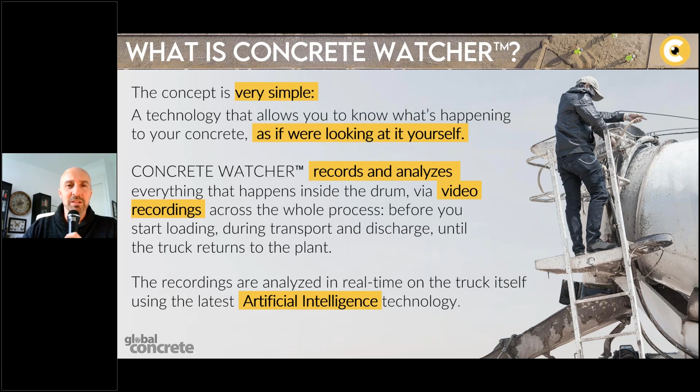So with these recordings, it's kind of like a security camera, but you don't need to look at it, like in the movies where the security guard is looking some other way and so the robbers go in. It's analyzed with artificial intelligence, so it's looking at it all the time, and it's checking all the time what's going on.

So this is a real and worldwide need, and here I put an example of a client of mine. They text a lot every day in a WhatsApp chat, checking what's going on site. So the boss is telling one of the lab technicians, please arrange a technician to check the slump for all trucks here, they mean at the plant, and then follow the truck on site to ensure no water is being added. So this happens everywhere, and this has been happening all along.

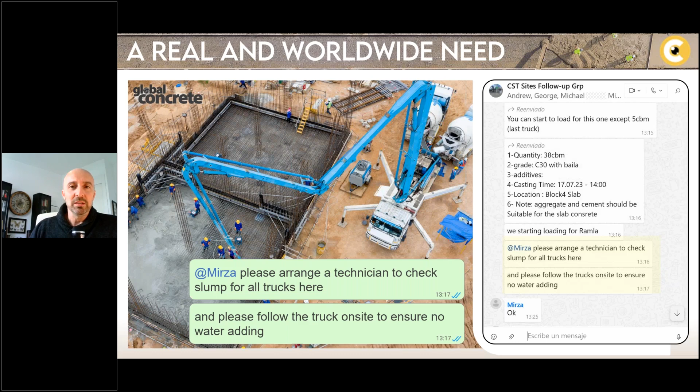People need to police the drivers in a way, or to guard the concrete to see that nobody is tampering with it. So this technology solves this need. So the system is installed on the truck. It's basically a small box that you put down here, number one. It has a camera that goes up there by the loading chute. And this box produces a Wi-Fi signal and connects to the internet, so you can see what's going on in the cabin, and you can see what's going on online from the plant or from a mobile device.

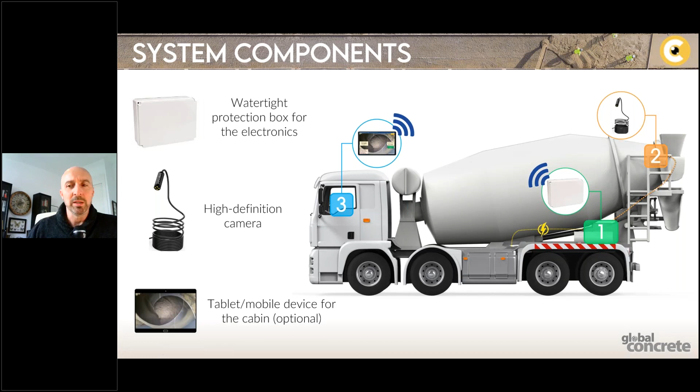So what does it do and how does it do it? It has this camera and it does a continuous recording of what's going on. So you have guaranteed traceability. It records very short videos, like 30 seconds, continuously, and they are associated to the truck and to the exact date and time. So you have the whole history of what's going on with that truck.

Then the AI analysis, artificial intelligence analysis, happens on the truck, so it doesn't need a network connection. And it happens in real time. And it can give alerts. For instance, the most basic alert is that the camera is covered, so the driver needs to go clean it.

And also, the driver can operate the system. It can run automatically, or it can have an interface with a tablet or a mobile phone to say, okay, I'm doing this, I'm doing that, start recording, stop, etc.

The data transmission is automatic. So it has a SIM card like your phone, and it uploads that analysis and it uploads the videos, so you can watch and you can see and you can get all these alerts from the plant or from wherever you are in your phone. It gives you this online access in real time to all what's going on, and you have a full-fledged management application where you can see what's going on with each truck, with the fleet, etc.

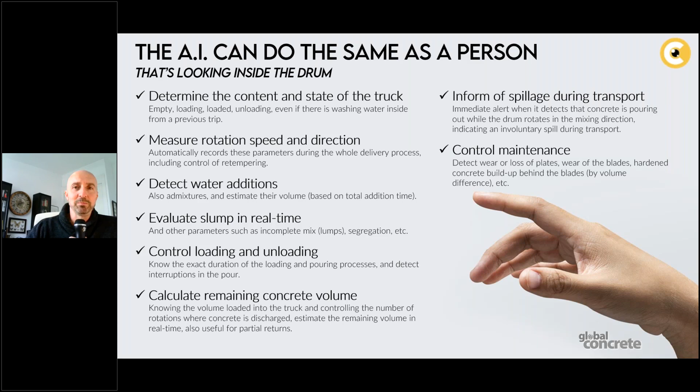But being an artificial intelligence, like a robot, it's better than any human because it's always alert. It doesn't sleep, it doesn't get tired, it doesn't get distracted. So it's doing its job all the time, 24/7. It learns continuously, because it's like one central brain looking at all the concretes all around, with many eyes. Each camera we have is one eye. It's like having hours or years of experience put into one person, in one brain.

It makes objective evaluations. It doesn't cheat. It doesn't tip the scales to get the result that is convenient or that it likes, to cover for someone or something like that. It records everything. It doesn't forget anything because everything is recorded, and it's hard proof, hard evidence of what's going on, because it's a video recording.

And it gives you immediate alerts. It's like it doesn't forgive you. Whenever something is wrong, it will tell you, and if the driver is not cleaning the camera, for instance, it will tell the boss immediately. So there's no escape from it.

So it's a patented technology. We filed the patents in Europe and USA for this. And these are some examples of installation. These are some of the first prototype units. This one is in Belgium. You see where the box is attached. It's a very small box, easy to attach.

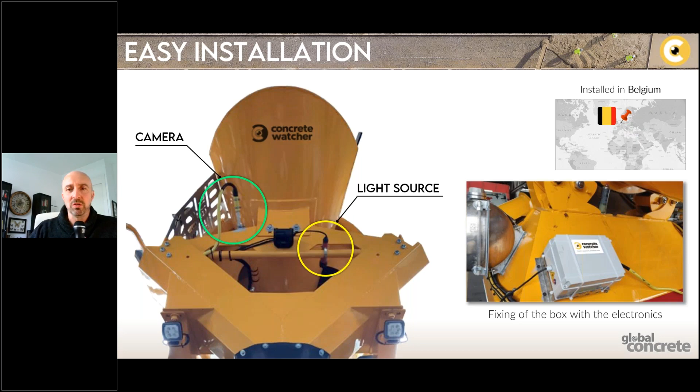It just needs the power from the battery pack. So no connection to the central computer of the truck, to any of the truck systems like oil pressure or air pressure or whatever. Okay, and then the camera and the light source, it's very easy to install. Actually, in this case, we had this pipe here in this truck. Every truck is a little bit different, but we put this light with just the metal bracers.

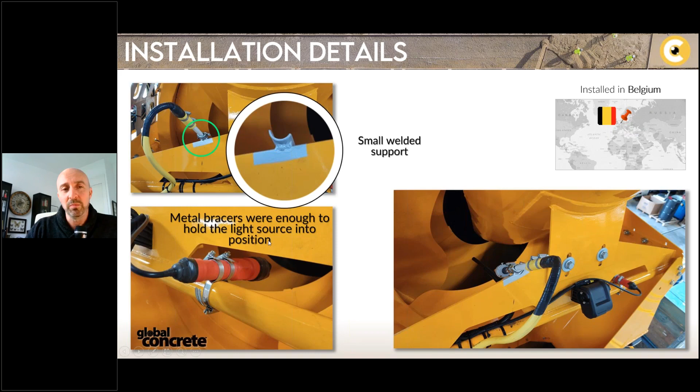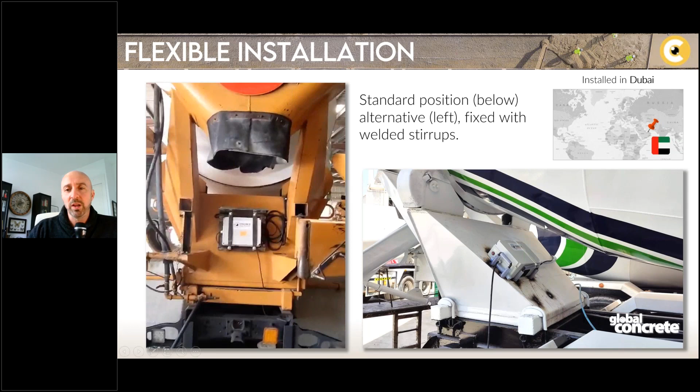This is a very powerful flashlight to see the end of the drum. You'll see in a bit. Okay. So there are many alternative positions for this. Usually this goes in the back of the truck for the length of the cable of the camera, just that.

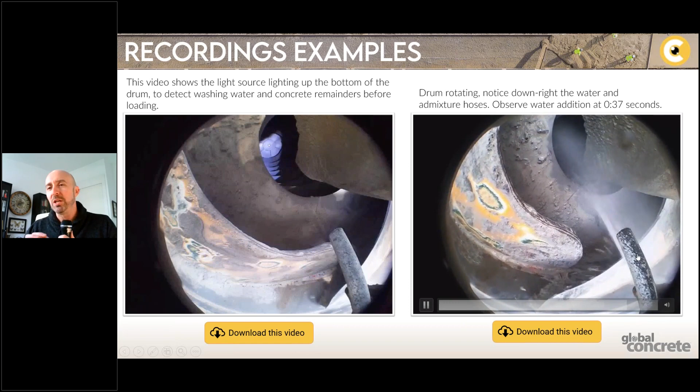Okay, it cannot actually measure how much water because it's not a flow meter, but we can calibrate for the pipe and see how many liters go per second, and then we can check how many seconds water has been added. So it's a very good assessment of how much water has been added to the truck.

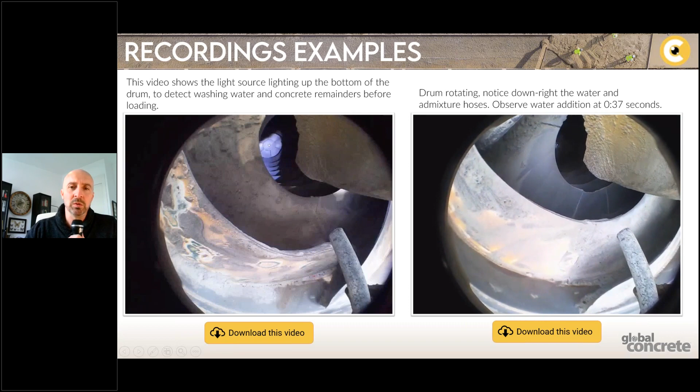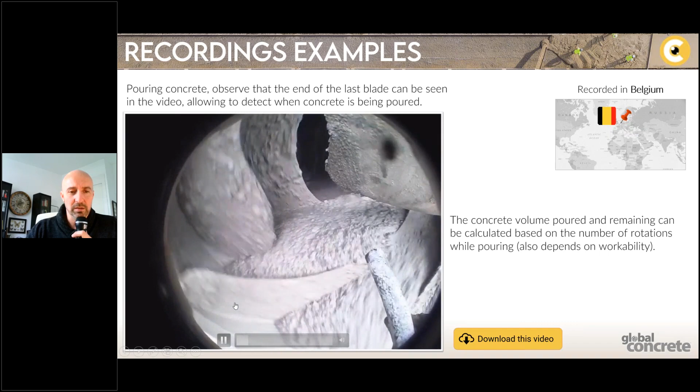In this one, we see the concrete unloading. You can see here, and here's the very end of the last blade, so you can see the concrete actually pouring out. Okay, there is a small stain here. This is not relevant for a cleanup or clean me alert.

And here we can see the rotation speed. We can see the slump of the concrete. We can evaluate the slump of the concrete on how it flows, how it goes on top of the blade, etc. And counting the speed and counting the rotations, we can calculate how much concrete has been poured out.

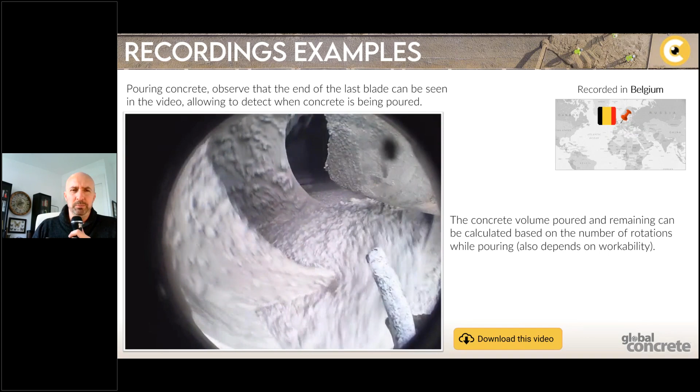So in this particular case, it's a very large truck, like a 12 or 14 cubic meters. They can do that in Belgium. So it takes a long time to unload the truck. And this is a very valuable information for the logistics.

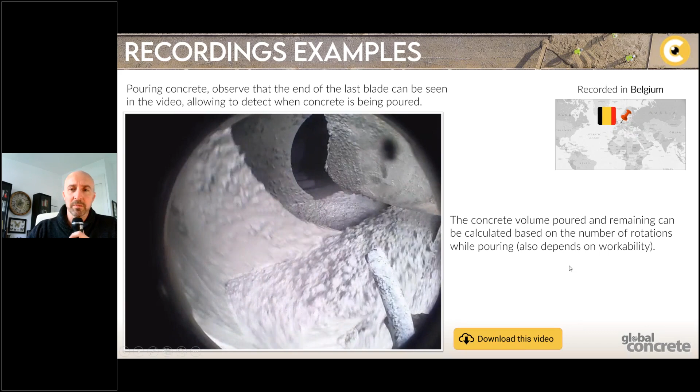And this is another example in the UK. This truck is turning the other way. It's built differently. So this direction is loading direction. And this was in transit. So you can see now, and you'll be able to see in a second, that the concrete is going out. So what is going on here? The truck is turning in the loading direction, but the concrete is coming out anyway. So that is a spillage during transport.

Okay, I was actually in the car behind the truck, and if you can cross-reference that with the GPS, and we can do that, we can connect to a GPS system, we can pinpoint where the spill happened. Okay, exactly which corner, which street this happened.

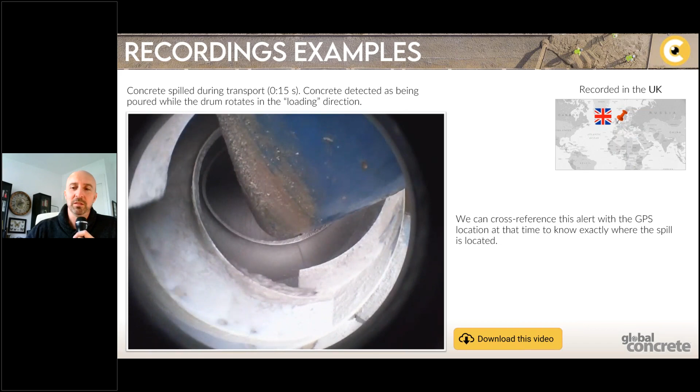Okay, and these are the analysis and the alerts we can produce. Okay, so it has a full-fledged management tool. These are some screenshots of the software, this management app that I mentioned.

Okay, so you have a fleet status in real time. You have a list of alerts for every truck. You can get a detailed activity log for each truck, statistics. You can check the history of the alerts and of the videos, etc., and you can receive these alerts by email or WhatsApp or Telegram. Okay.

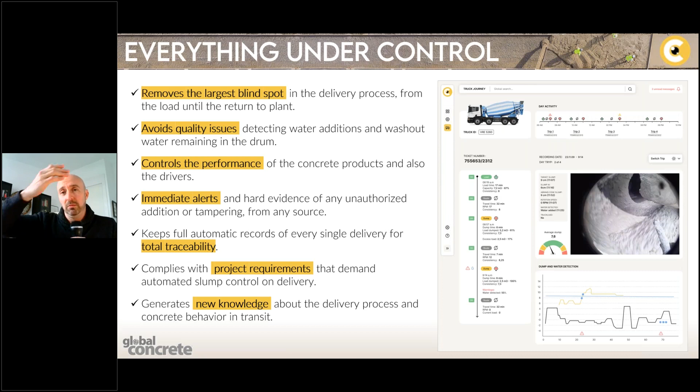So this system with this app, and this is also a screenshot, removes the largest blind spot in the process, because we know what we do at the plant. Then it's like this: we close our eyes and we don't know exactly what's going on. We need to trust people to write things down on paper, and then we kind of know what they do on site, because they do the slump check, air check, density, and then they test specimens for strength and durability. So having this system avoids a lot of quality issues.

Okay, you can detect the water additions, you can detect the washout water from the previous trip that's in there before loading, which is a typical trick that the drivers do. It controls the performance of the concrete and also the drivers. You get these alerts, you have traceability, and it complies with project requirements that demand an automated slump control on delivery. There haven't been many, but they are growing.

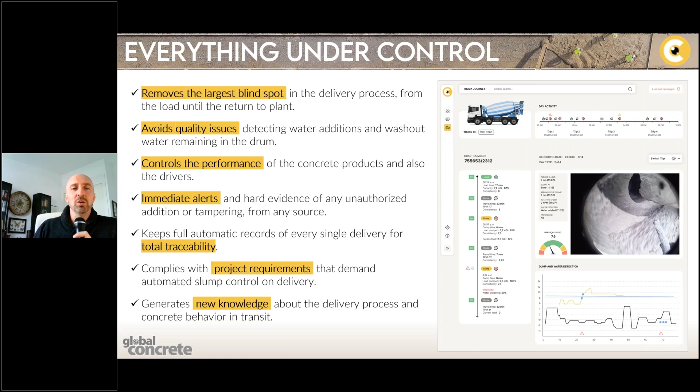Okay, the one big example in Europe, where most people are from, is the HS2, the high-speed railway in the UK, going from London up north. They require these type of systems in the trucks to be allowed to deliver concrete. Okay, and this also creates new knowledge about the delivery process, because you get a lot of information that you never had before on how the concrete behaves, on how the people behave, on what's going on.

Okay, and we can combine that with our other system, which is my original system, which is a full-fledged quality control, quality assurance system called Concrete Quality. Okay, where you get all the materials information, all the mix designs, management, and optimization. This system connects to the batching system to get all the batch records and analyze the actual weights. We get automatic weather information.

We get all the testing that's on site for fresh concrete with slump and air, etc. All the test specimens for compressive, flexural, shrinkage, whatever. Okay, and any other monitoring devices like maturity or durability sensors. And also we get statistics and reports and testing plans, etc.

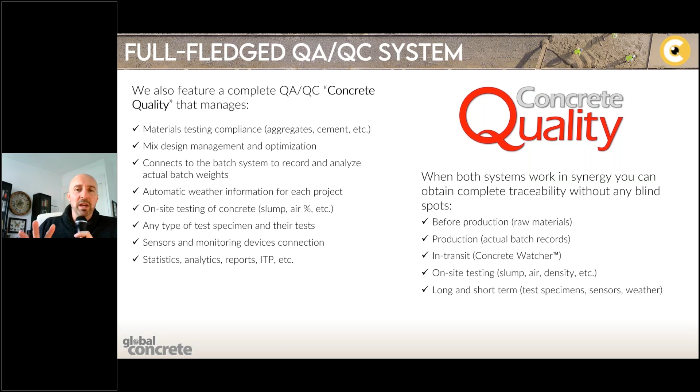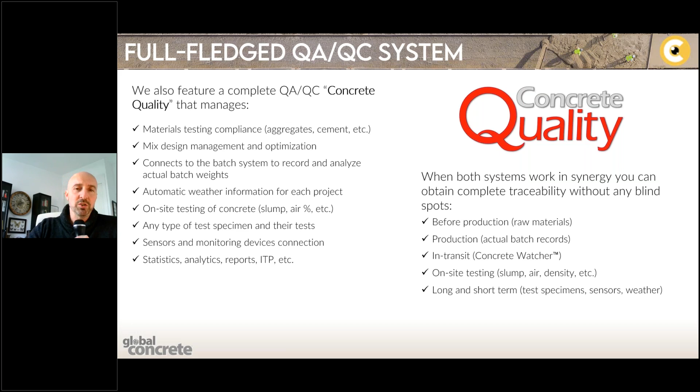So when we combine these systems, we have a synergy, because we have complete traceability without any blind spots. So we know what's happening before production with the raw materials. We know what's happening during production with the actual batch records. We know what's happening with the concrete during transport. We know what's happening on site, because we get that information into the quality system, for the fresh concrete and for the hardened concrete.

Okay. So when we combine these systems, this combination will allow us to do things like predicting the strength or the durability just before you pour the concrete. Okay, so this can actually avoid a pour where you will get a low strength, because you have everything under control.

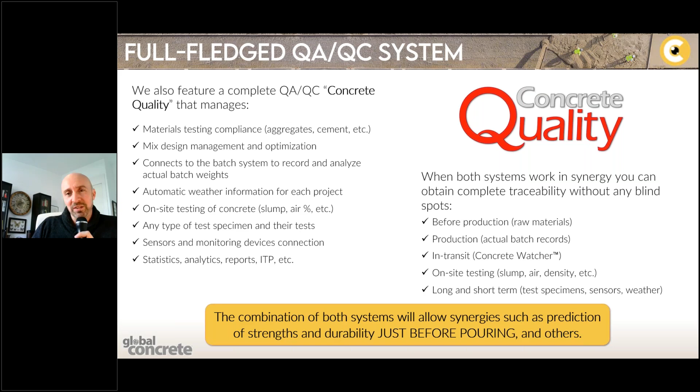This can also be turned the other way around to say, okay, you can add water up to this point and don't add more because you will get a fail, or the truck has been waiting too much time, the concrete is getting hard, so you pour it now or you take it back before you have bad concrete on site. Because that is very, very expensive. It's around 25 times the sale price of the cubic meter to remove one that failed.

So in the end, we have this complete system, which is like a self-driving system. All of these things happen automatically, because we can get the information from the plant automatically. We can read PDF reports from the aggregate testing or the cement testing automatically. Then we have this central key new thing, where the AI is giving us the analysis of what's happening in transit. And then we have everything that happens on site.

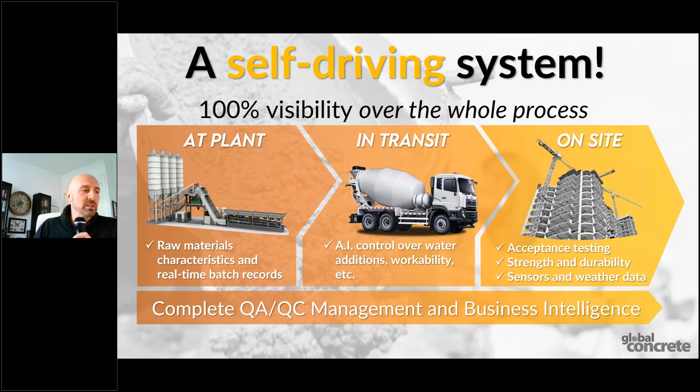And again, this is automatic because we have weather information automatically. We get data from sensors. We analyze the PDF reports and read the strengths and everything. So this becomes not only a QA/QC management system, but a business intelligence system. So this affects the bottom line of the business, because you can improve and you can save costs in many, many ways with this.

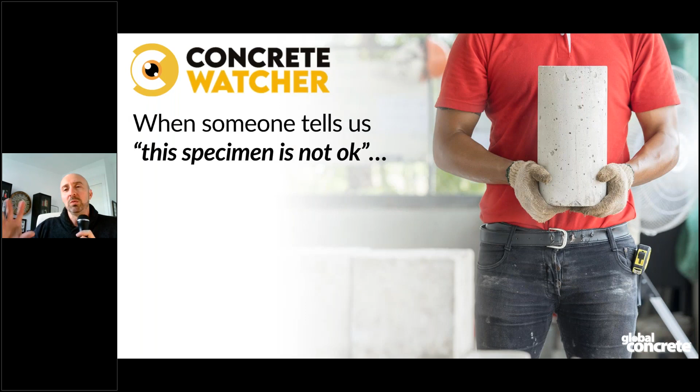Okay, so this is something a client told me: when someone tells you that this test specimen is not okay, it's a fail, you can answer, yeah, it's true, it's a specimen that failed, because I can prove that my concrete is just fine. So this puts weight on the testing, on the sampling, because people usually don't look at that when something fails, but that process has many failures, because of how they sampled, because of how they cured it, etc. So it's a line of defense for the producer, to have all this hard evidence that everything went right.

So what's coming in the future for us? Short term is basically what we're working on now: this integration with the QA/QC system to do these predictions, integration with the digital delivery ticket — we're working with the Spanish National Ready Mix Association for that — and integrating with different GPS tracking systems. In the midterm, these alerts for the limit of water addition, like don't add more water or you will fail, or the waiting time, etc.

Automatically generating these water versus slump charts or water versus admixture charts, so you can know how to manage your concrete correctly, and get this expression, the dynamic mix optimization. So this is coming in the future. You'll hear more about this, where every single truck you load is optimized for that moment, those conditions, the weather, the transport time, what they need on site, what the latest cost is, etc. So it's a perfect optimization of a mix.